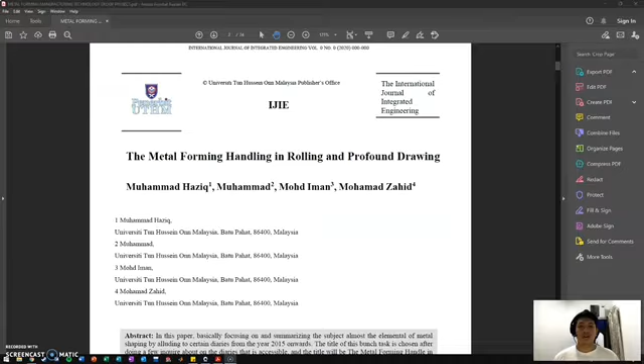For the introduction, metal forming handling is the most common process utilized to deliver basic parts and components that have been utilized broadly in industries such as vehicles, aviation, and machines. The metal shaping process involves the deformation of sheet or tube metal to form a certain component with a fixed geometry.

In this study, it is critical to know the material behavior in metal forming, the appropriate temperature required for metal shaping, and the role of friction and lubrication within the metal forming process. The effect of temperature also plays an important part in the sheet metal shaping process.

The proper temperature must be identified before carrying out the test of an example or certain metal shaping process. Generally, strain hardening and strength will be diminished due to the use of higher temperatures. Metal forming can work at different temperature ranges: cold, warm, and hot working.

To decrease the destructive impact of friction, metalworking oils will be utilized as a tool-work interface in most shaping operations. By using lubricants, it will create a far improved surface finish of manufacturing.

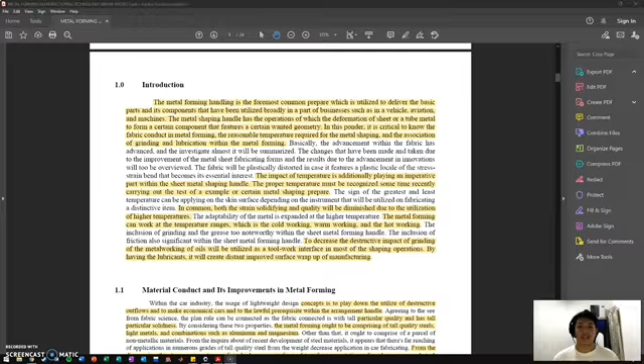Next is material behavior and its improvements in metal forming. For example, in the car industry, the use of lightweight design concepts is to minimize harmful emissions and to make economical cars that meet legal requirements in the design process.

The design rule can be applied as the material used is high strength and high stiffness. Considering these two properties, metal forming should involve high strength steels, light metals, and alloys such as aluminium and magnesium.

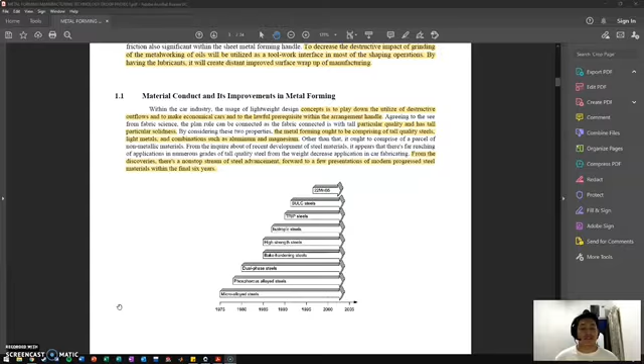From the findings, there is a continuous stream of steel advancements leading to the presentation of modern advanced steel materials within the last six years, as shown in the diagram below.

Now I will show you the influence of temperature in metal forming. For metal forming manufacturing in general, the temperature gradient between the die and the work has a large effect on the metal flow during the process.

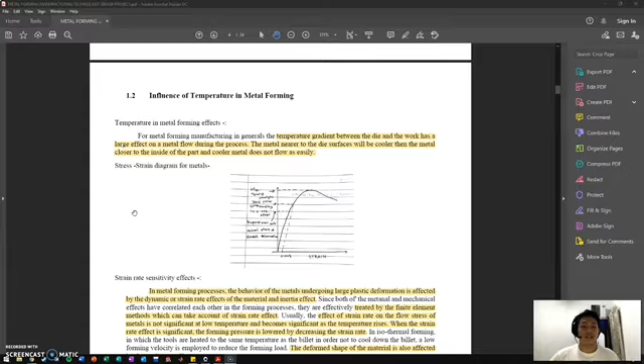The metal nearer to the die surfaces will be cooler than the metal closer to the inside of the part, and cooler metal does not flow easily. As shown in the diagram below, this is the stress-strain diagram for metals, where the tensile strength will rise and then fluctuate after reaching the max point.

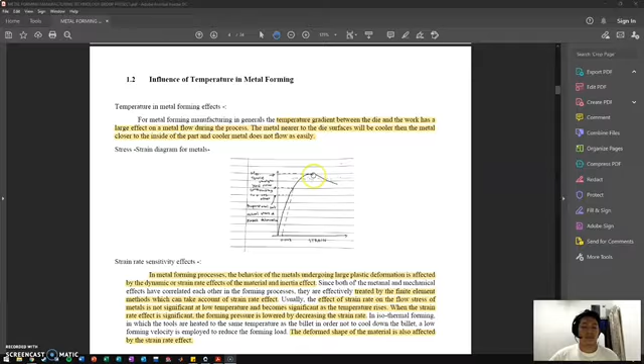Next, the strain rate sensitivity effects. In metal forming processes, the behavior of the metal undergoing large plastic deformation is affected by the dynamic or strain rate effects of the material and inertia effects.

These are effectively treated by finite element methods, which can take into account the strain rate effect. Usually, the effect of strain rate on the flow stress of metals is not significant at low temperature and becomes significant as the temperature rises.

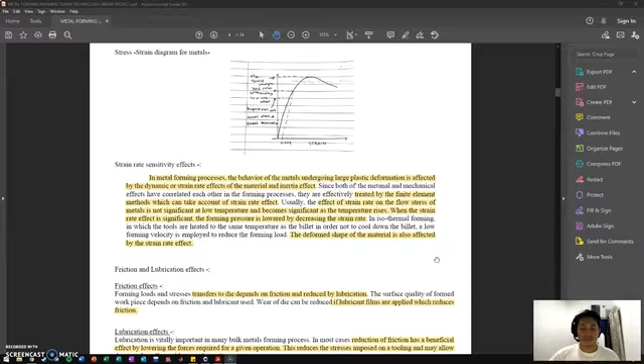When the strain rate effect is significant, the forming pressure is lowered by decreasing the strain rate. The deformed shape of the material is also affected by strain rate effect.

Now I will show you the friction and lubrication effects. For friction effects, forming loads and stresses transferred to the die depend on friction and are reduced by lubrication. The surface quality of the formed workpiece depends on friction and lubricant used. Wear of the die can be reduced if lubricant films are applied, which reduces friction.

Next is lubrication effects. Lubrication is vitally important in many bulk metal forming processes. In most cases, reduction of friction has a beneficial effect by lowering the forces required for a given operation. This reduces the stresses imposed on the tooling and may allow the use of smaller and less costly equipment.

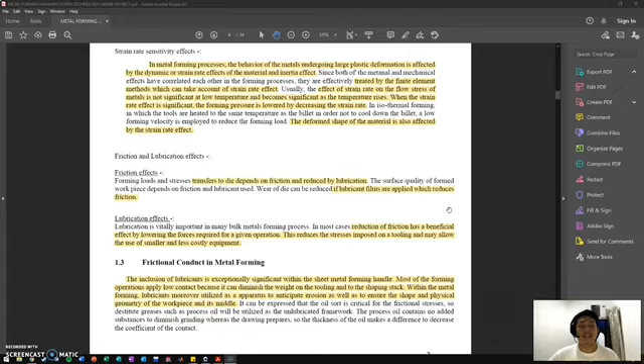Last one from me is frictional behavior in metal forming. The inclusion of lubricants is exceptionally significant within the sheet metal forming process. Most forming operations apply low contact because it can diminish the weight of the tooling and the shaping load.

Within metal forming, lubricants are also utilized as a means to prevent erosion, as well as to ensure the shape and physical geometry of the workpiece and its middle.

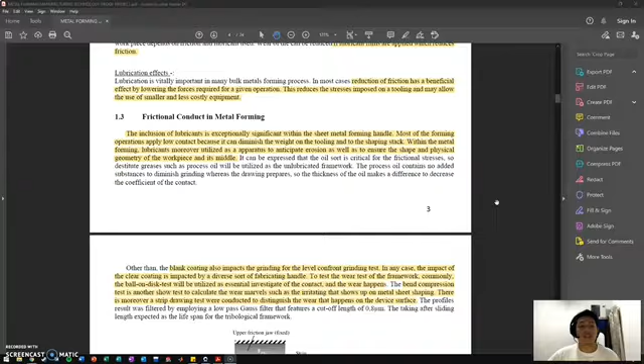Other than that, the blank coating also impacts the grinding for the level confront grinding test. In any case, the impact of the clear coating is impacted by a diverse sort of fabricating handle. To test the wear test of the framework, commonly the ball on disk test will be utilized as essential investigate of the contact and the wear that happens.

Bend compression test is another short test to calculate the wear phenomena such as irritating that shows up on metal shaping. There is also a strip drawing test conducted to distinguish the wear that happens on the device surface.

The avoidance of the grease will diminish the number of process steps in production. It will also diminish the environmental impacts and decrease the avoidable health burden. The complex challenges must be confronted amid the metal shaping, prepared by obeying the field of material science to realize the avoidance that is required. That's all from me.

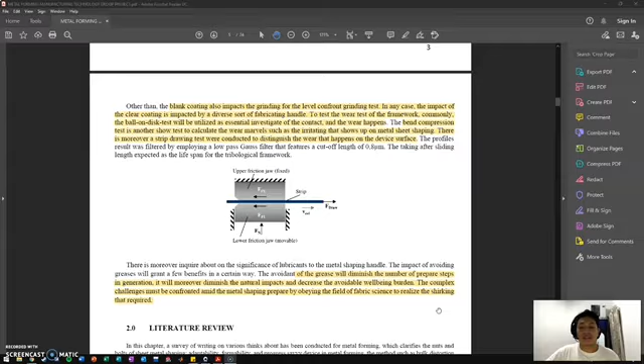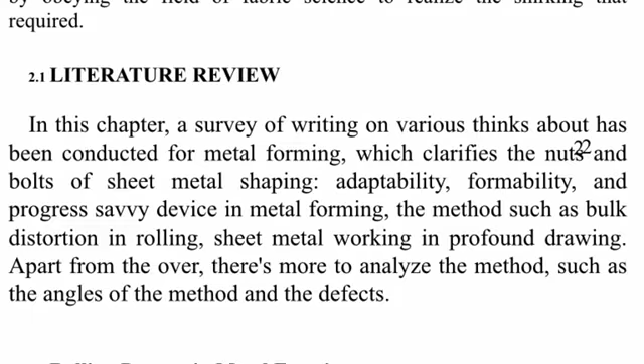For this literature review chapter, a survey of writing on various things has been conducted for metal forming, which clarifies the basics of sheet metal shaping, flexibility, formability, and progress in tooling in metal forming. The methods such as bulk distortion in rolling, sheet metal working in deep drawing, and strip drawing, among others. There's more to analyze the methods, such as the angle of the method and the defects.

For the 2.1 rolling process in metal forming, as we see in rolling, forging and extrusion, the characteristics of sheet metal are as follows, one by one. The first is strength, which is the ability of a material to withstand the forces acting on it without breaking, getting deformed, or bending.

For elongation, this is the main characteristic of sheet metal which can get stretched out without fracture or failure. For elasticity, this is the ability of a material to absorb the forces acting on it and get stretched in different directions, then return to its original shape.

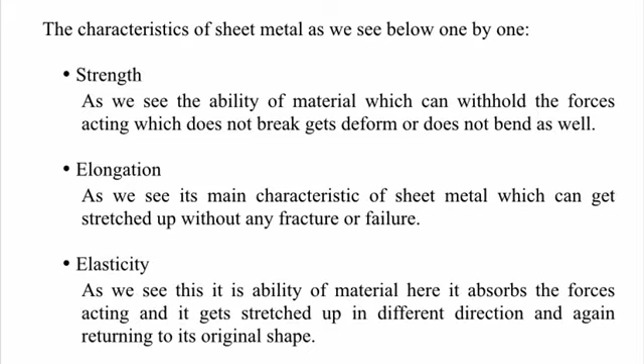For plasticity, this is the ability of a material, when forces are applied on it, to not return to its original shape. And conductivity is the ability to produce moving electrons which further produce electricity.

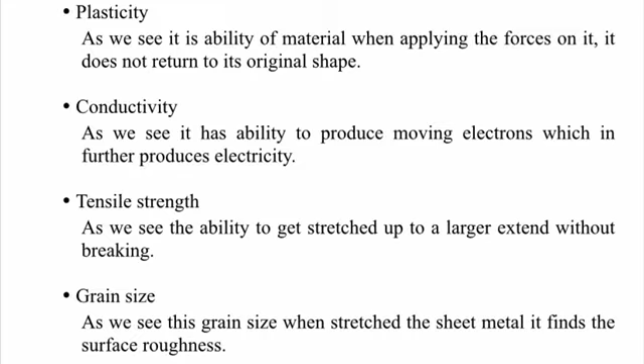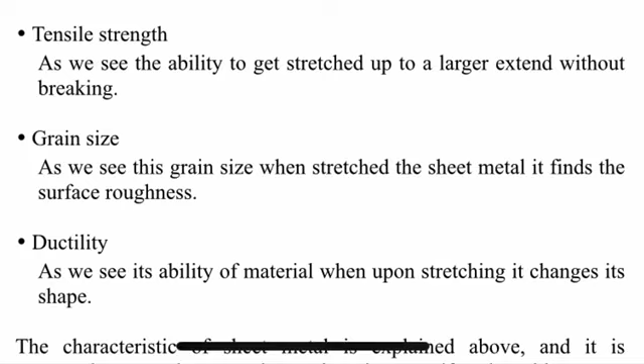For tensile strength, this is the ability to get stretched to a larger extent without breaking. For grain size, when stretched, the sheet metal shows finer surface roughness. Ductility is the ability of a material, upon stretching, to change its shape. So the characteristics of this sheet metal are explained above.

Definition of the rolling process: rolling is defined as a process to form metals where the metal strip is pressed by two or multiple rollers, thus forming a uniform thickness. To do this, temperature is essential. There are two types of processes: one is hot rolling and another is cold rolling.

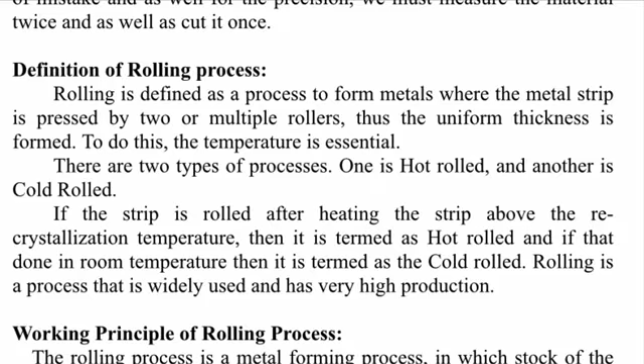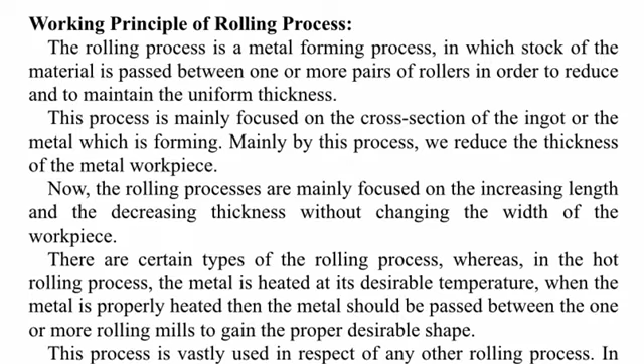For the working principle of the rolling process, I will explain a little bit. The rolling process is a metal forming process in which stock of material is passed between one or more pairs of rollers in order to reduce and maintain uniform thickness. So the rolling process mainly focuses on increasing length and decreasing thickness without changing the width of the workpiece.

Here are the types of rolling mills. There are 5 rolling mills which are commonly used for rolling metals. First is two-high rolling mills, second three-high rolling mills, third four-high rolling mills, fourth tandem rolling mills, and fifth cluster rolling mills.

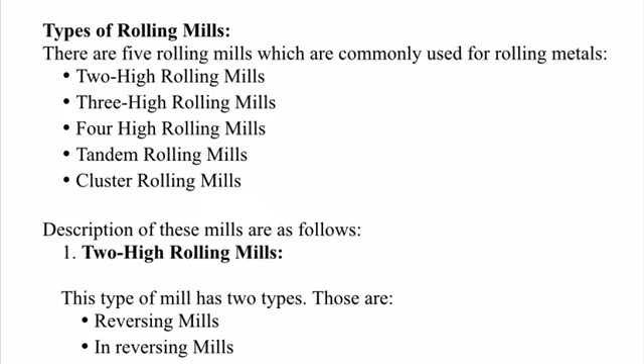For the first, there are two-high rolling mills. They have two types of this mill: those are reversing mills. For the two-high rolling reversing mills, in this type of mill the rollers are both adjustable. In this mill, rotation of the two rollers is made in two different directions.

For the two-high non-reversing mills, in this mill the two rollers continuously revolve in the same direction, and we cannot reverse the direction of the rollers. In this operation, the motive power is less costly.

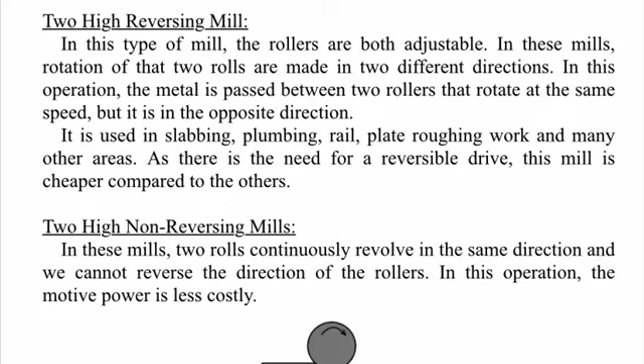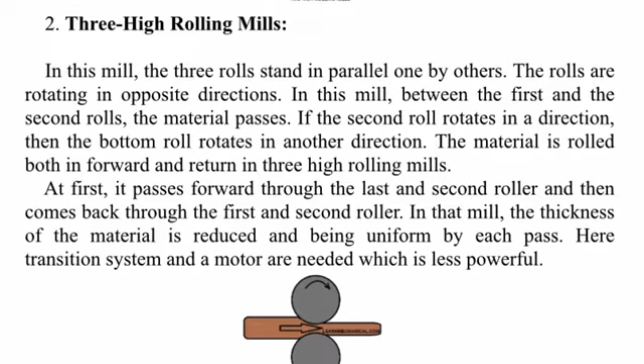Second is three-high rolling mills. In this mill, the three rolls stand in parallel one by another, rotating in opposite directions. Between the first and second rolls, the material passes. If the second roll rotates in one direction, then the bottom roll rotates in another direction. The material is rolled both in forward and return passes in three-high rolling mills.

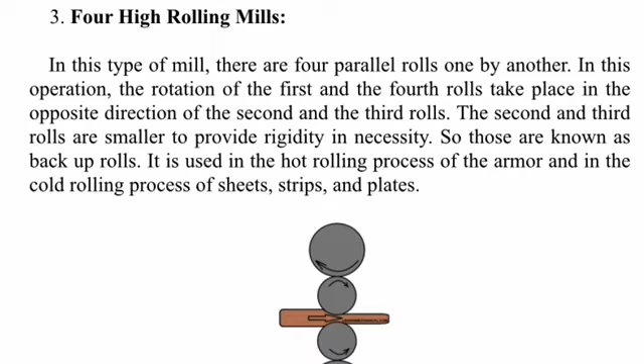The third is four-high rolling mills. In this type of mill, there are four parallel rolls one by another. The rotation of the first and fourth rolls takes place in the opposite direction of the second and third rolls. The second and third rolls are smaller to provide rigidity when necessary, so those are known as backup rolls.

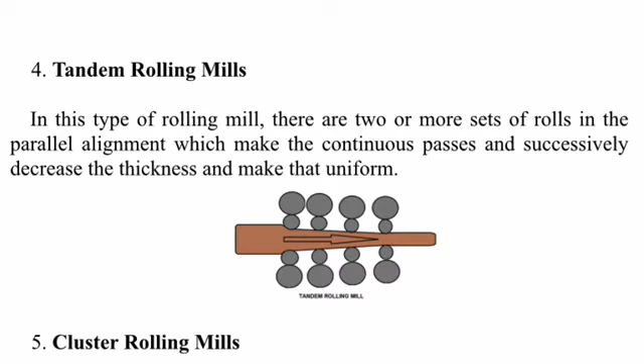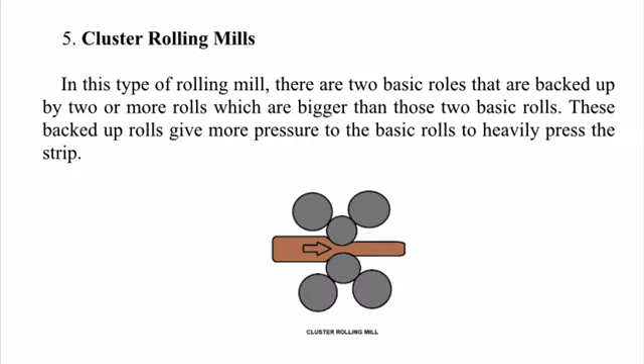It is used in the hot rolling process of armor and in the cold rolling process of sheet strips and plates. The fourth is tandem rolling mills. In this type of rolling mill, there are two or more sets of rolls in parallel alignment which make continuous passes and successively decrease the thickness to make it uniform. The fifth is cluster rolling mills. In this type, there are two basic rolls that are backed up by two or more rolls which are bigger than those two basic rolls. This backup roll gives more pressure to the basic roll to heavily press the strip.

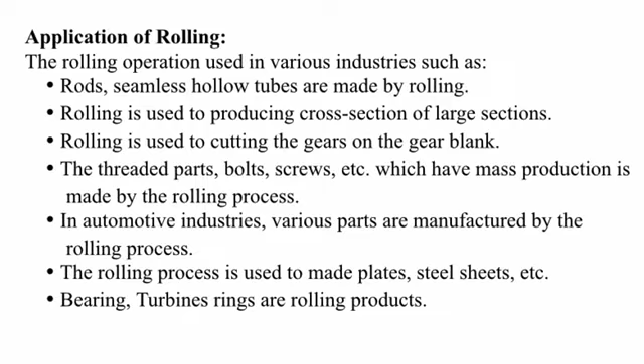The application of rolling mills is used in various industries. Seamless hollow tubes are made by rolling. Rolling is used to produce cross-sections of larger sections and to cut gears on the gear blank. Threaded parts, bolts, screws, and other examples with mass production are made by the rolling process. In the automotive industry, various parts are manufactured by rolling process. The rolling process is used to make plates, steel, and sheets. Bearings, turbines, and rings are rolling products.

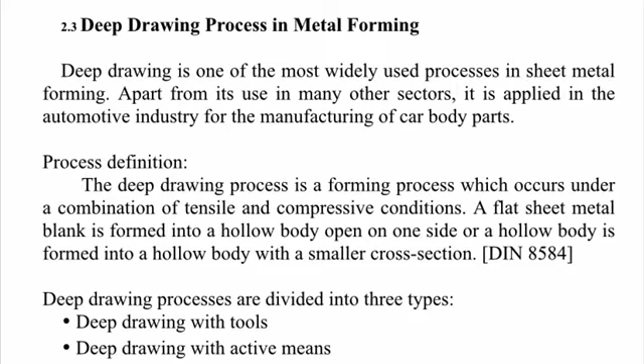First is deep drawing with tool, deep drawing with active means, and deep drawing with active energy. This is the last part from me.

Summary of the literature review. In conclusion, deep drawing is the most commonly used sheet forming technique available to producers since it offers extraordinary shaping characteristics and solid aging resistance. It has been confirmed that this method is the most vital within the manufacturing world's forming stage. As for the rolling process, the present article focused on rolling operation as a metal forming strategy in mechanical manufacturing. We can see various researchers put forth their findings on how to deliver effective production to avoid defects or problems in rolling or deep drawing, as well as formability of the metal forming. We gather a better understanding of the sort of advancement in rolling and deep drawing processes to meet expanded operational performance in future mechanical manufacturing.

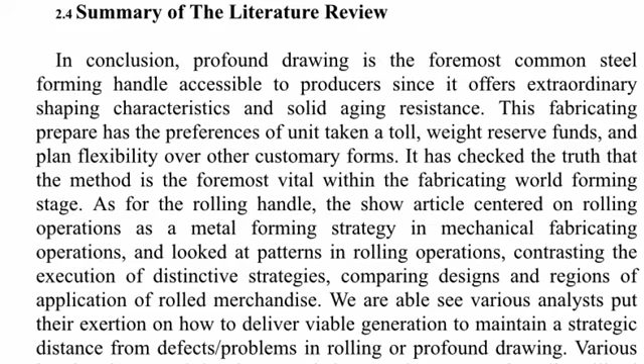First part is about methodology. The method of metal forming can be classified into many methods or special procedures to perform a certain process. For this paper, it is chosen that the method for metal shaping will be the rolling process from bulk deformation.

So the second part is cross wedge rolling. In theoretical and experimental modeling, cross wedge rolling is the basic plastic forming process in the production of axial symmetric geometry. The rolling process is performed using wedge shaped tools.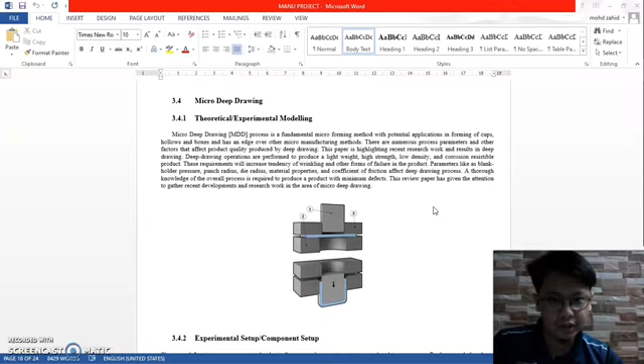Micro deep drawing, or MDD process, is a fundamental microforming method with potential application in forming of cups, hollows, and boxes, and has an edge over other micro manufacturing methods. There are numerous process parameters and other factors that affect product quality produced by deep drawing. This paper highlights recent research work and results in deep drawing.

The deep drawing operation is performed to produce lightweight, high strength, low density, and corrosion resistant products. We use the deep drawing operation because of these great characteristics and benefits.

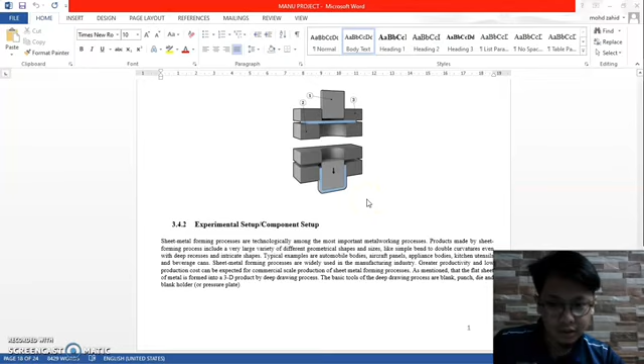So here we can look at micro deep drawing. Next we go to the experimental setup and component setup.

Sheet metal forming processes are technologically among the most important metalworking processes. Products made by sheet forming process include a very large variety of different geometrical shapes and sizes, like simple bends to double curvature, even with deep recesses and intricate shapes.

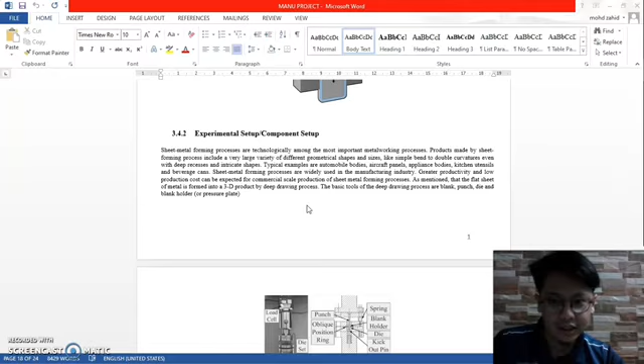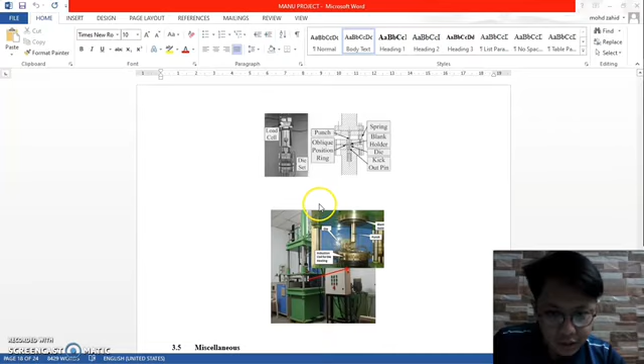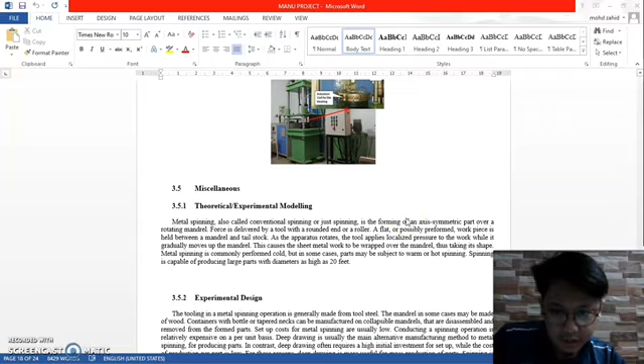So we can see here the experimental setup and also the component setup. This is about the machine and also the other components. Next we're going to the other parts, which is about the miscellaneous theoretical and experimental modeling.

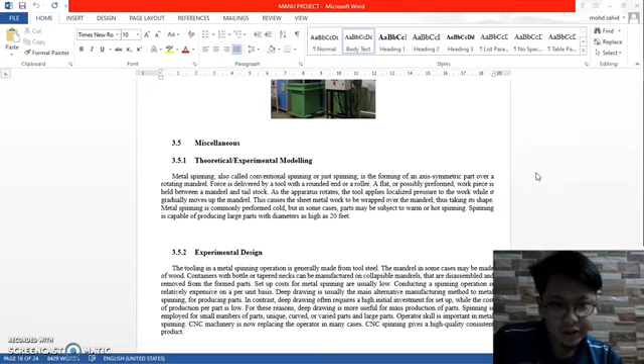Metal spinning, also called conventional spinning or just spinning, is the forming of an axis-symmetric part over a rotating mandrel. Force is delivered by a tool with a rounded end or a roller. A flat or possibly preformed workpiece is held between a mandrel and a tailstock. As the apparatus rotates, the tool applies localized pressure to the work while it gradually moves up the mandrel. This causes the sheet metal work to be wrapped over the mandrel, thus taking its shape.

Metal spinning is commonly performed cold, but in some cases parts may be subject to warm or hot spinning. Spinning is capable of producing large parts, with diameters as high as 20 feet.

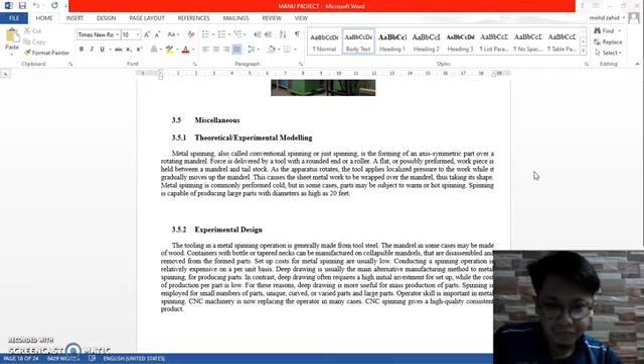By the experimental design, the tooling in the metal spinning operation is generally made from tool steel, and the mandrel in some cases may be made of wood. Containers with a bottle or tapered neck can be manufactured on collapsible mandrels that are disassembled and removed from the formed parts. Setup cost for metal spinning is usually low, which I think makes it great for design since one factor is the low cost.

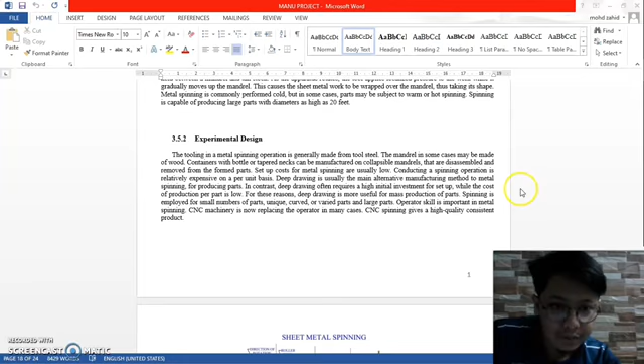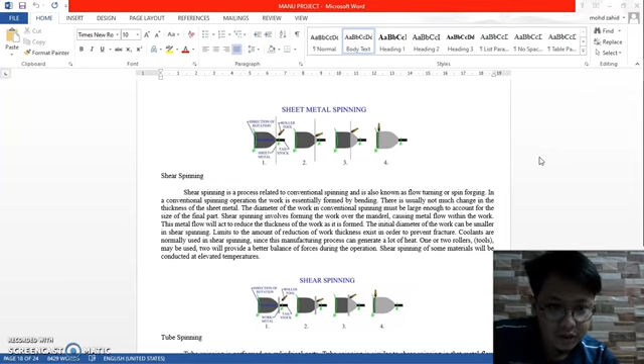Next we can see sheet metal spinning. Here they have shear spinning. Shear spinning is a process related to conventional spinning and is also known as flow turning or spin forging.

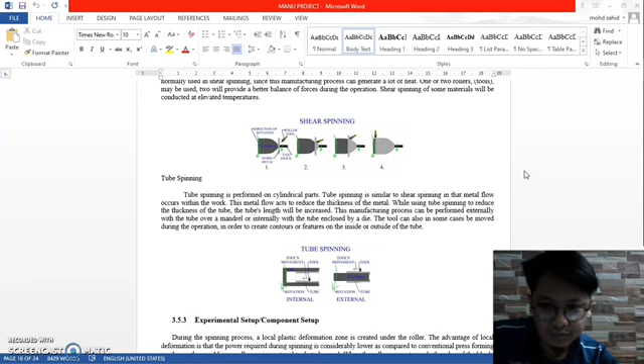Tube spinning is performed on cylindrical parts. Tube spinning is similar to shear spinning in that metal flow occurs within the work. Here is about the experimental setup and component setup.

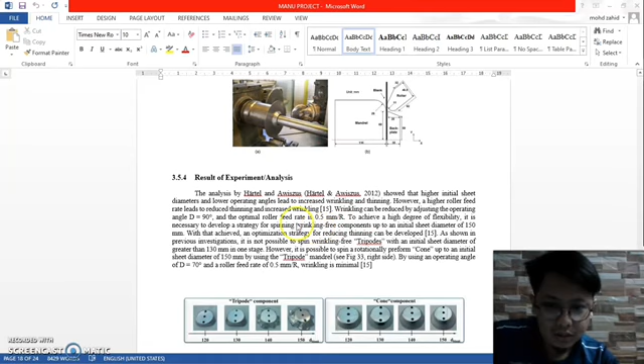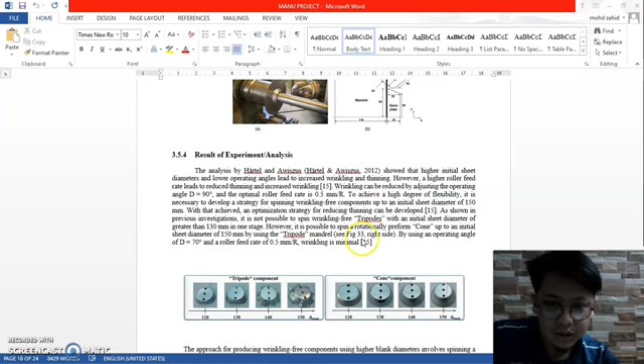For the result of the experiment, analysis by Härtel and Awiszus shows that a higher initial sheet diameter and lower operating angle increase wrinkling and thinning. However, a higher roller feed rate leads to reduced thinning and increase wrinkling.

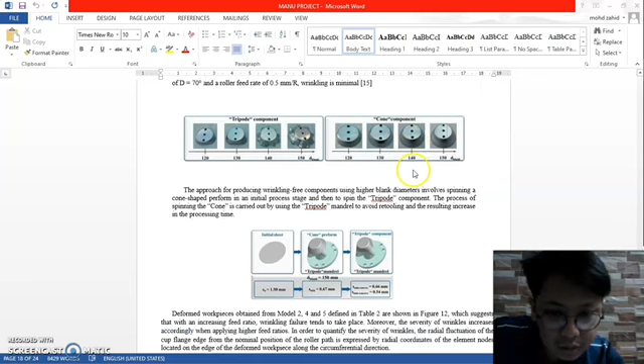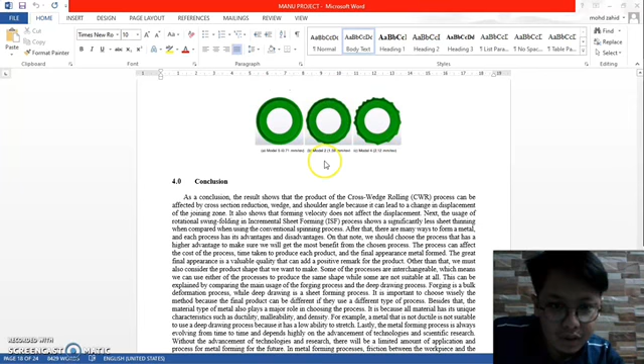So about the components: tripod component, cone component. As the conclusion, the results show that the product of the cross wedge rolling process can be affected by cross-section reduction, wedge and shoulder angle, because it can lead to a change in displacement of the joining zone. It also shows that forming velocity does not affect the displacement.